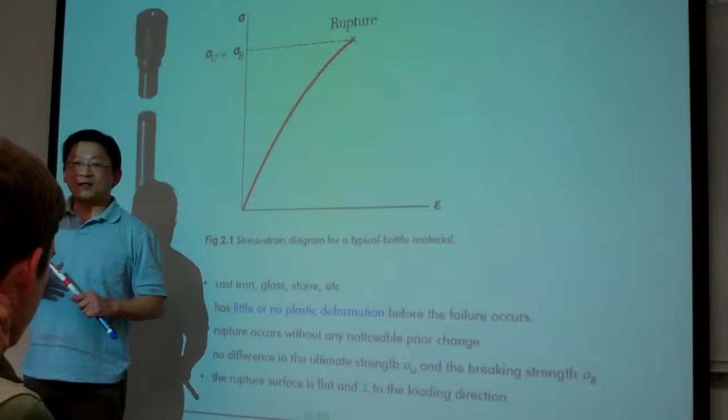Very limited or narrow range of the elasticity. Basically, you simply give a slight kick, then that material will get into plasticity, and right away the energy will be absorbed. If that material has any defect, then the crack will propagate easily and get until the fracture. But compared to the ductile material, it's more, I would say, stronger than accepting the loading.

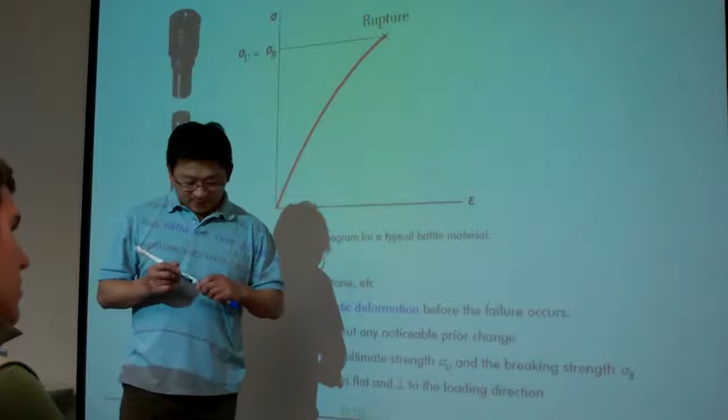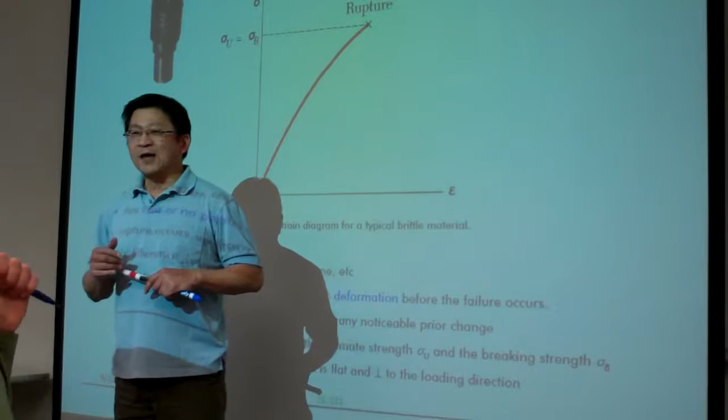Probably that time you haven't been born yet. 1989, 1987, I forgot. There was during one launch of the space shuttle, and it just exploded, I think, within a few minutes after launching. Do you remember that story? Challenger? I forgot which one. It happened in the 1980s, probably 87 or 86, whatever. Probably that is before you were born, right? Most of you were born here.

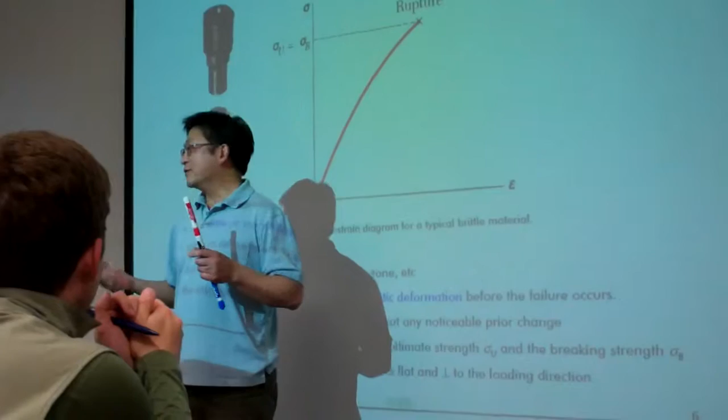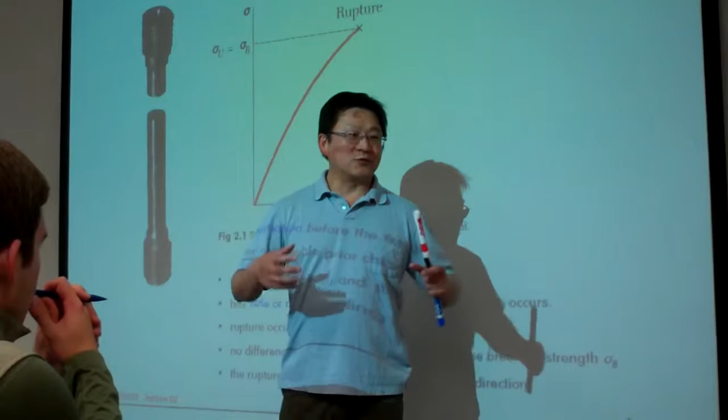Yeah, it was like there was a thermocouple failure at the end. Not thermocouple, it was an O-ring. That is due to the fuel leak through the O-ring. Why? Because under very extreme low temperatures, the O-ring, although it's rubber, under that low temperature basically becomes like glass, a glass-like material. Becoming glass, the O-ring loses its capacity to prevent that kind of leakage. So the fuel leaked from there, then it got ignited by the fire, and they just exploded in the air. That is one quick example for this.

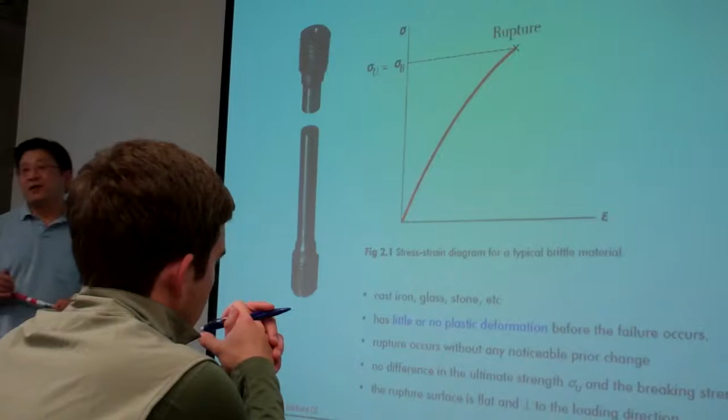And that is, more information will be about the material science, and that is called the glass transition temperature, about this kind of material. That's a different story, we don't need to consider that one. So let me move on quickly.

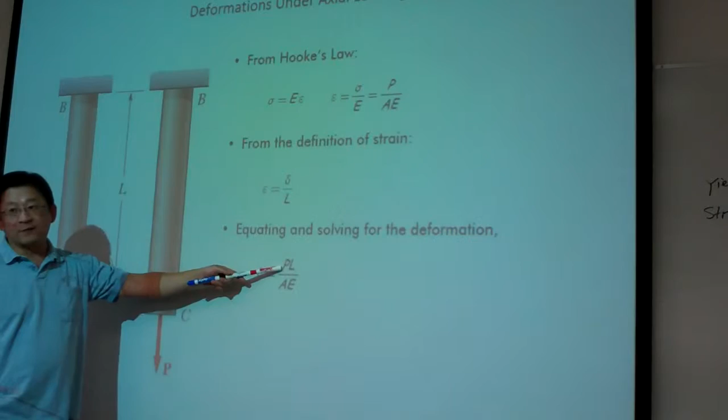Basically, those are the material properties. So this one, compute delta equal to PL over EA. Sometimes people like to use F, some depends on the symbol you use. Sometimes people use F, so delta equal to FL over EA. Don't feel surprised, this is the equation.

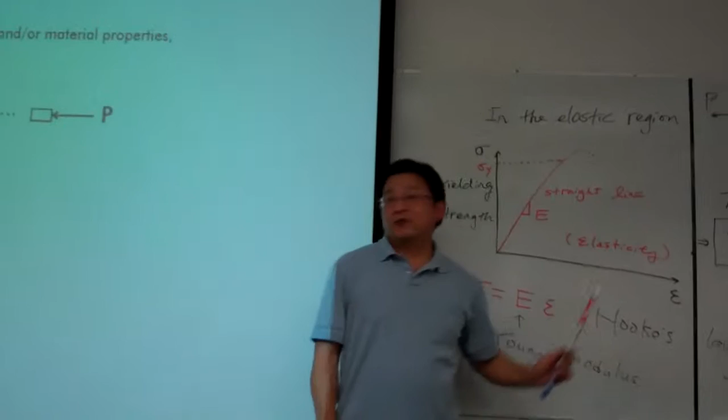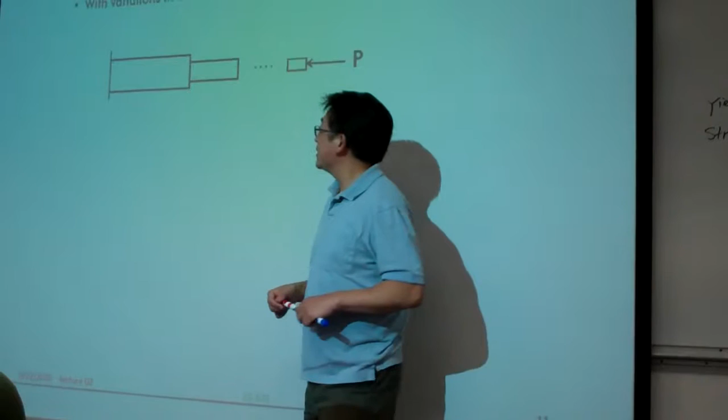We can apply this equation to many scenarios, and the follow-up is the application of this equation. For example, we might be able to apply this basic, generic form, or template, to different material models. For example, the first case I'm showing is the non-homogeneous material. What we call non-homogeneous means the cross-section is varying from one place to another. If we call it homogeneous, that means everything is uniform, everything is the same. So for this case, how can we calculate?

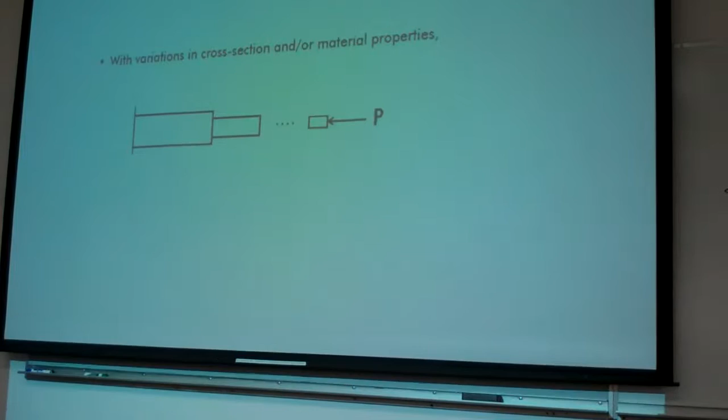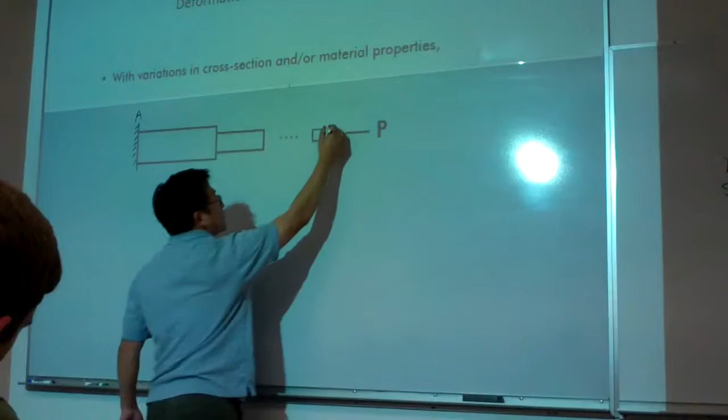I will get that out. So maybe let me utilize these slides and write down some words. For example, for this case, let me call this end A. This is fixed against the wall. And let me call this end B. And in between, let me say this is C, D, etc. So for example, we want to calculate

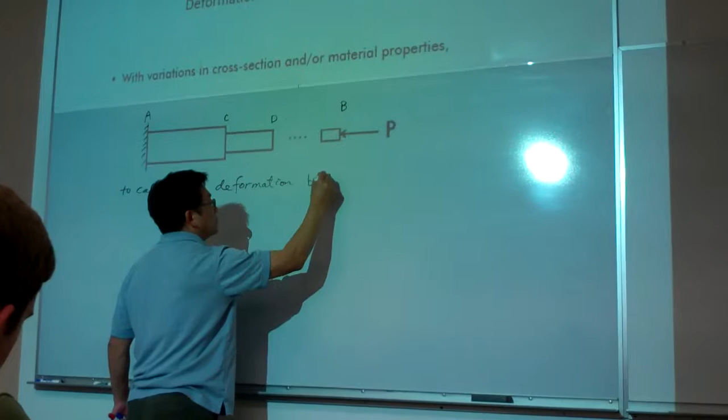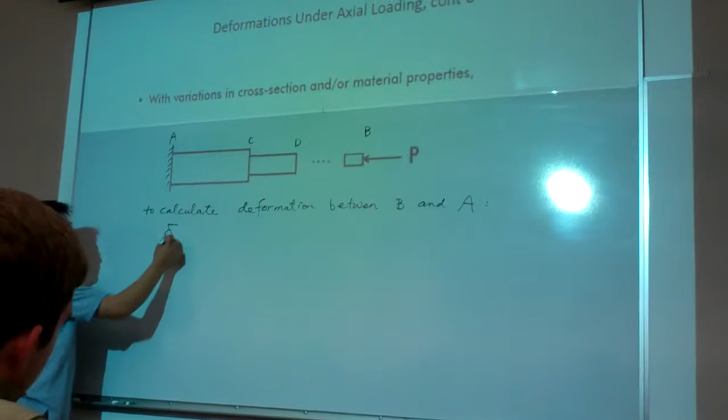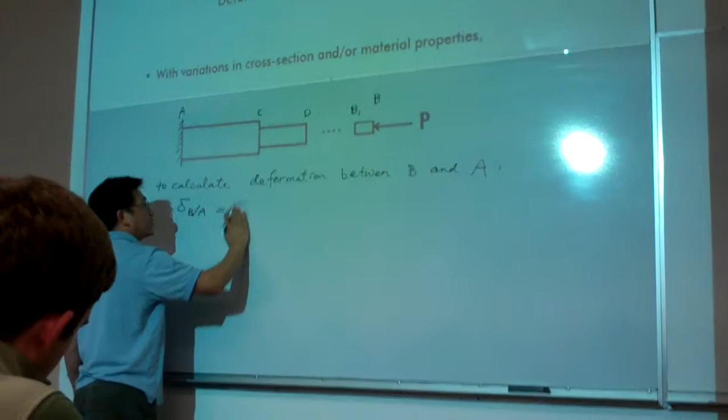deformation between B and A. So that means I want to calculate what is the deformation of the total non-uniform bar. So for this example, we can calculate this: deformation B relative to A, that is, for example, let me call this B1. So deformation B relative to B1, and then deformation B1 relative to something, and so on until deformation of C relative to A.

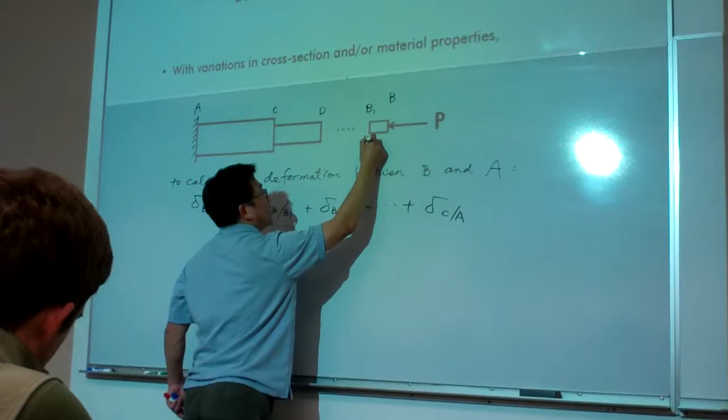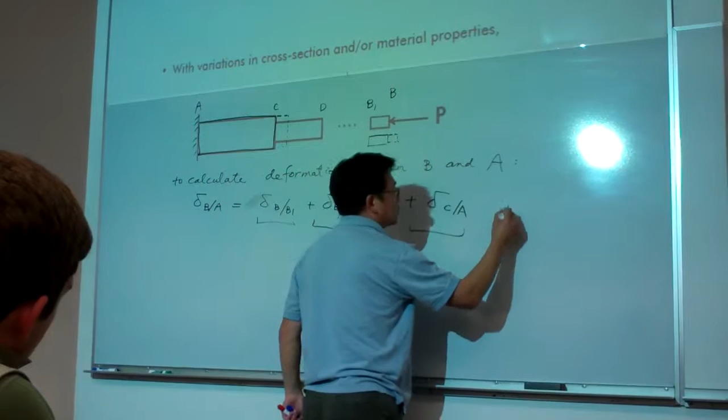So that means this part is the deformation of this case, and this part, if I take this as the material models, then this part simply is the deformation of this one. So simply the technique is this, which is to do the piecewise calculations. Okay, that is the strategy.

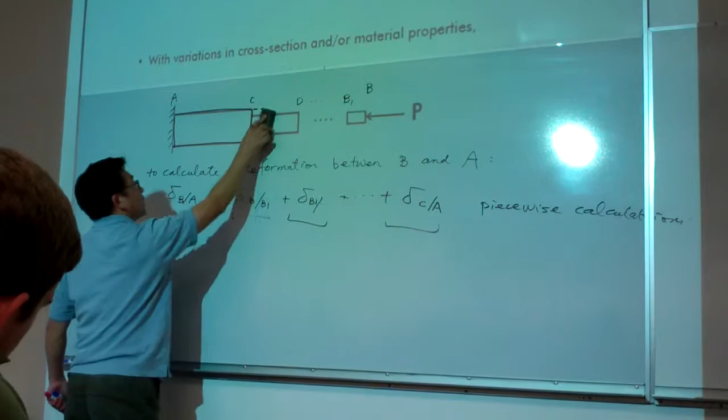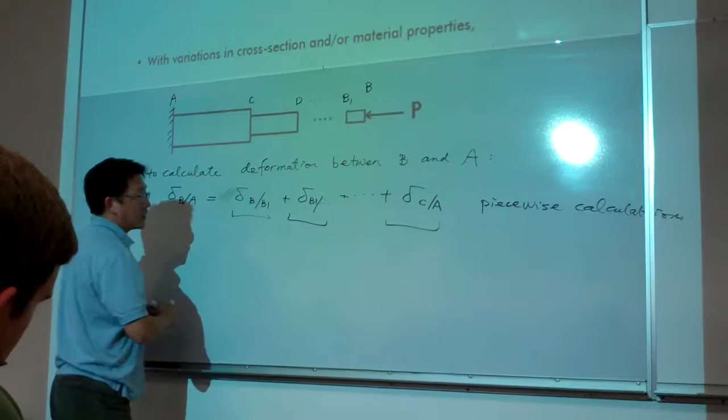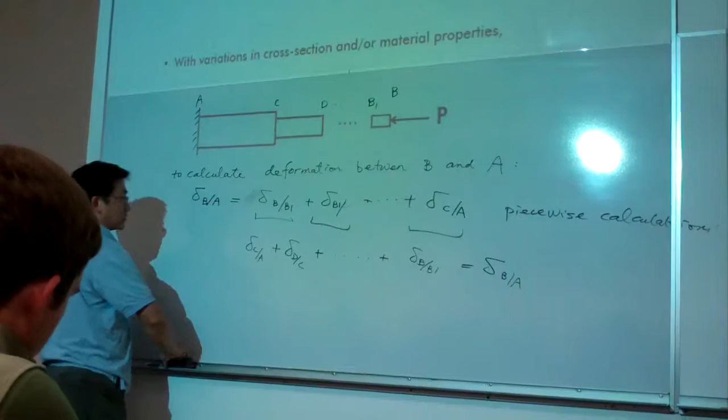And to do the piecewise calculation, let me make these things easier by taking away all the unnecessary drawing here. So for this case, I think this would be easier, allow me to rewrite this. So to cope with the sequence, let me rewrite: B relative to A will be equal to B relative to B1, plus delta D relative to C, plus delta C relative to A. Okay, allow me to erase this one.

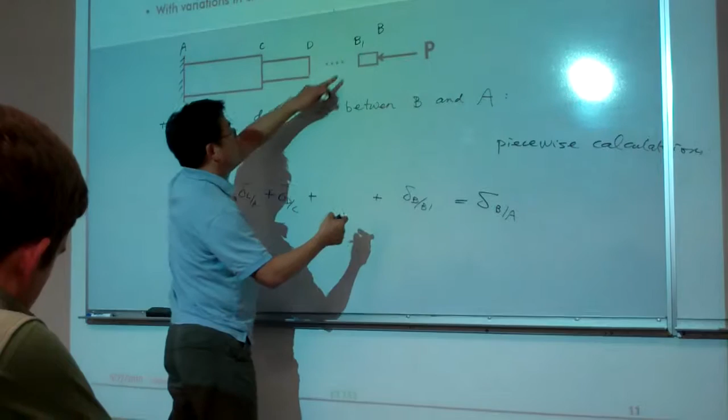So in this way, doing it piece by piece and comparing, that will be easier to mentally work through the things, okay? And actually for this case, right now we take the free body diagram like this. We take the free body diagram for this piece, this is B, this is B1. And then we continue, taking the free body diagram on CD, and then also we take the free body diagram on CA.

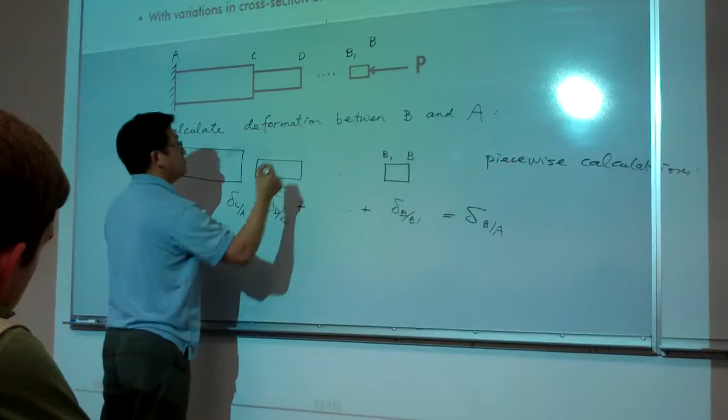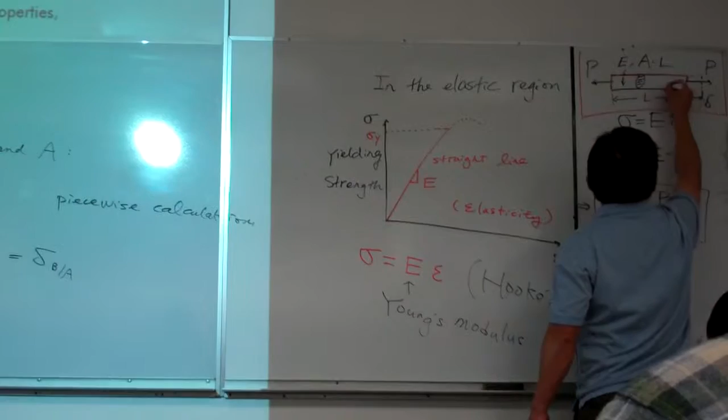Right now I want to utilize our generic model. For our generic model, we only have one uniform material bar. So to utilize that equation, I must come up with a drawing of the free body diagram that fits into that material model so we can utilize this equation.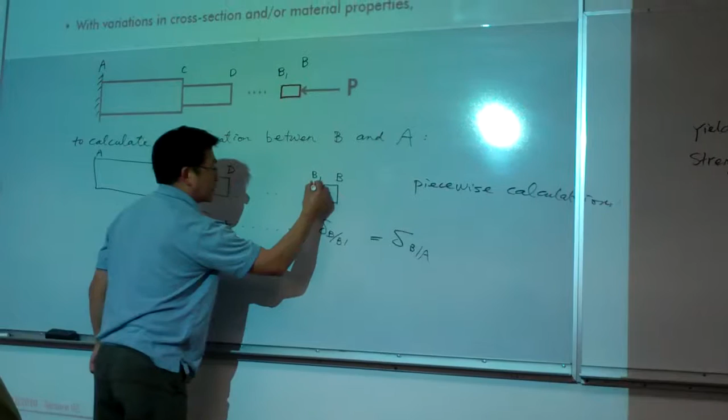For this example, I pick this as the free body diagram. Then gradually I work on the individual pieces, trying to find out the basic material model that can fit into that case. You know what I mean?

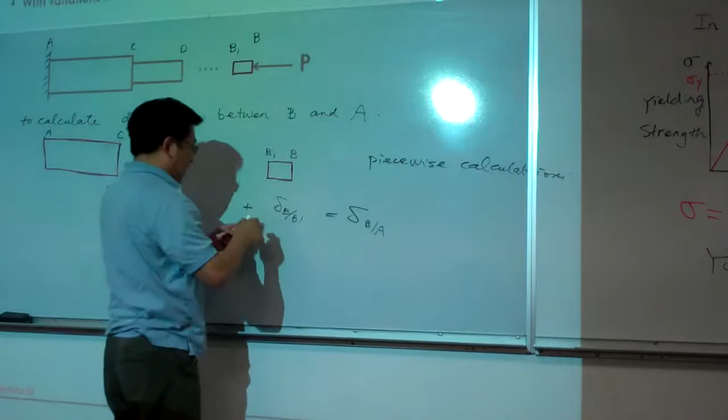That is a material model. Then we analyze the force. The P applied here, that is given.

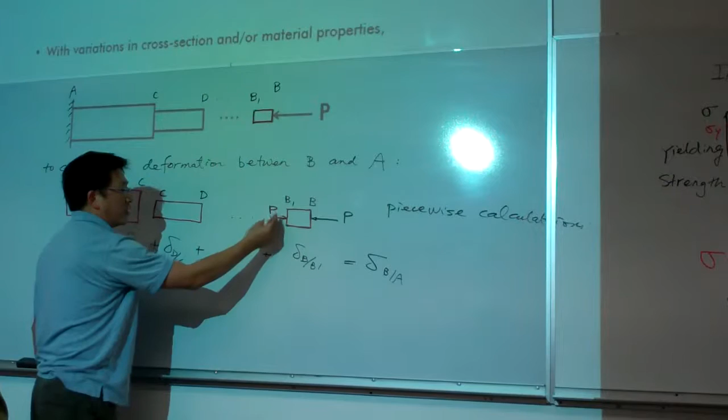In these serial connections, by taking the force equilibrium, let me use the color. This is the action-reaction force on this side, and this is P. Again, in each piece across the interface, the reaction will be transmitted. So in this case, here will be P, and here is P. Reaction, action, reaction, this is P, and this is P. Am I right?

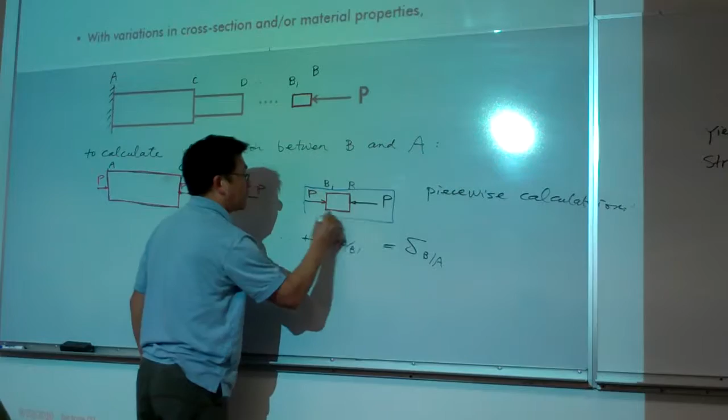If you look at individually, this is the material model we're fitting into our basic definitions. For this, that is another one. And for this, that is another one.

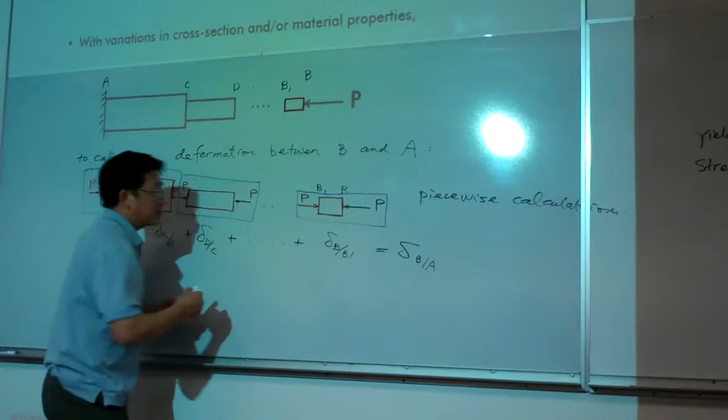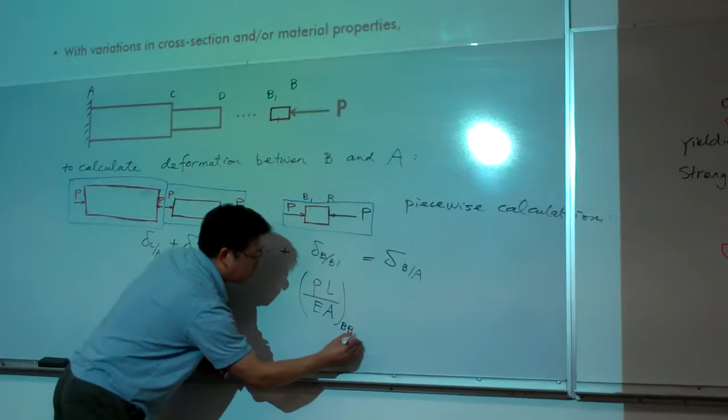So that means B relative to B1 is coming from here, basically that is PL over EA. Take up our geometry, take up our formulas, and this one is pertaining to this material. For example, say if this has the length, whatever the Young's modulus, whatever the area, let me call this for the portion BB1. So we have to take up whatever information is given in this problem in this segment. That is the meaning of this symbol.

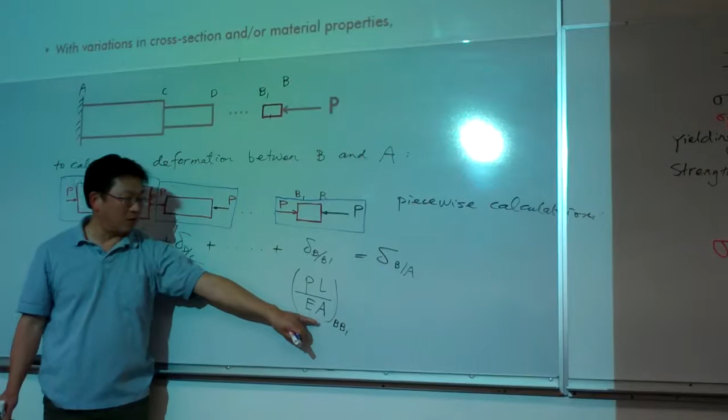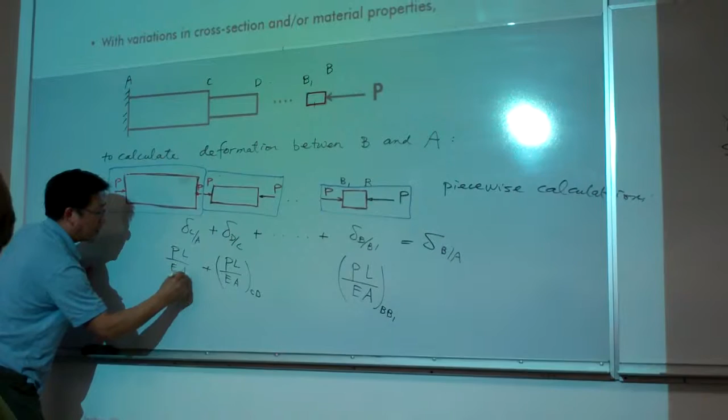And then the same thing for this one, that is PL over EA, for whatever the information in this piece, and that piece is CD. And then in this case, this is the portion for this one, that is PL over EA, for whatever the information that is AC.

How come the last one's not B1 B? Huh? How come the last one's not B1 B? Oh, either way. Just label it. You know what it means.

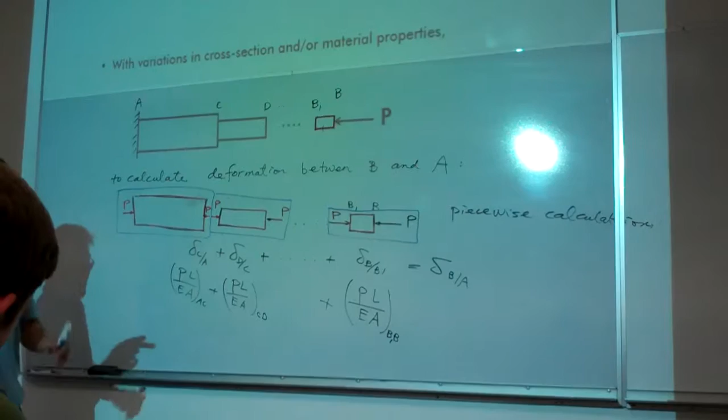Okay, doesn't matter. Since we're compressing all those, will we have a negative delta? Yes. For this example, that is a magnitude, and in total, that is compressive.

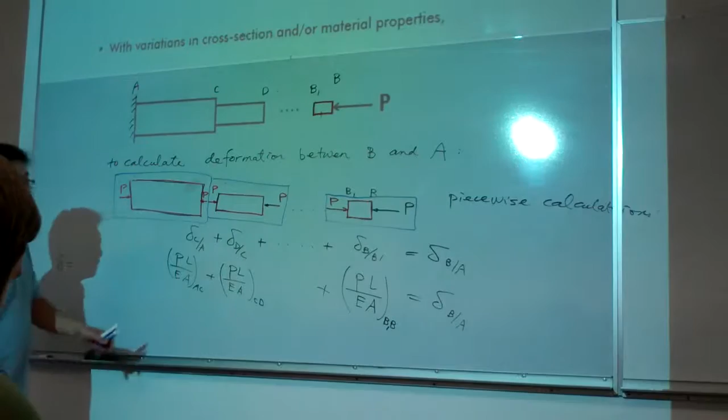So in general, for this case, we write it up based upon this information: this is B relative to A, that is the summation of the piecewise calculation. For each piece, we still stick with our generic platform here.

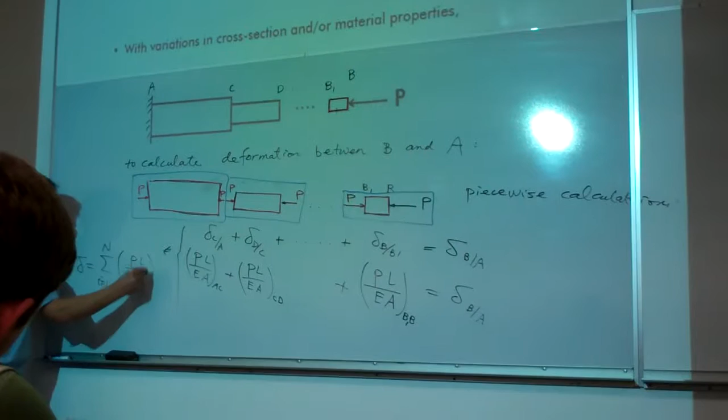So in general, for this case, we simply have the more general equation: for each piece from i equal 1 to N, that is the label of PL over EA. For each segment, we simply take out the individual terms and take the sum together. More practice will be on using these equations.

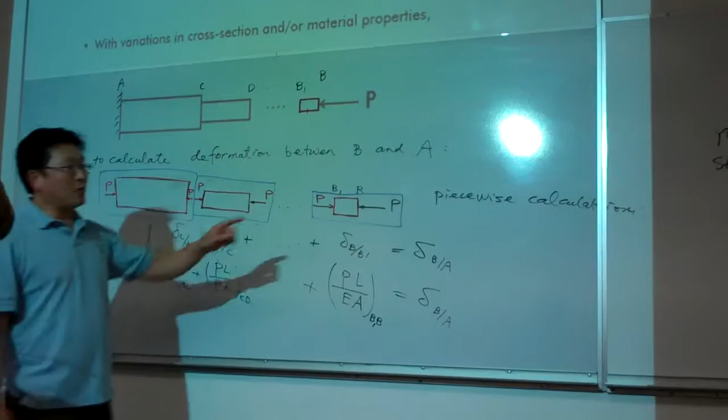Again, I wouldn't say this is a formula, just a symbolic calculation. The only formula is that one. And how to apply to this, we can use example C. Let me work on this one first, and then we'll go back to the different scenario.

Do you need me to turn off the light? Would that be okay working on this? Okay.

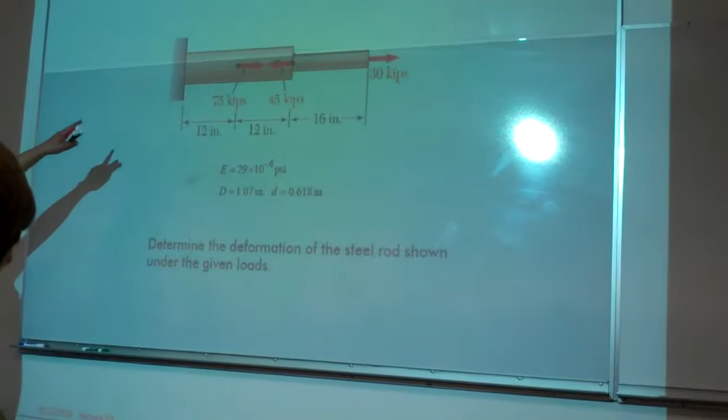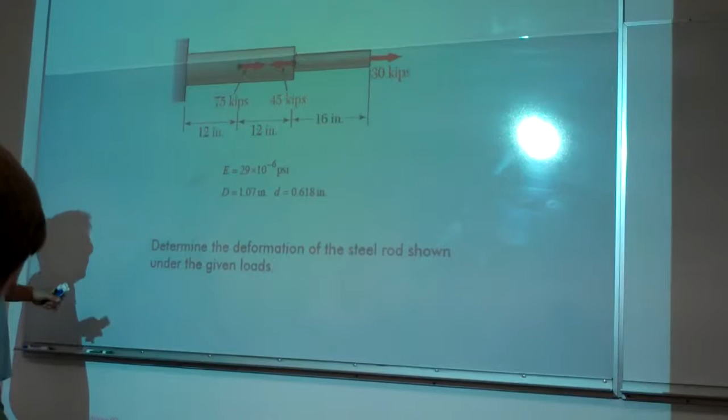So for this case, we have a loading like this. Here we have two pieces of different size bars. We want to calculate the deformation of this, made of steel. Basically what we want is to find the displacement at this free end, because this is fixed, so the deformation of the system can be represented by the displacement at this point.

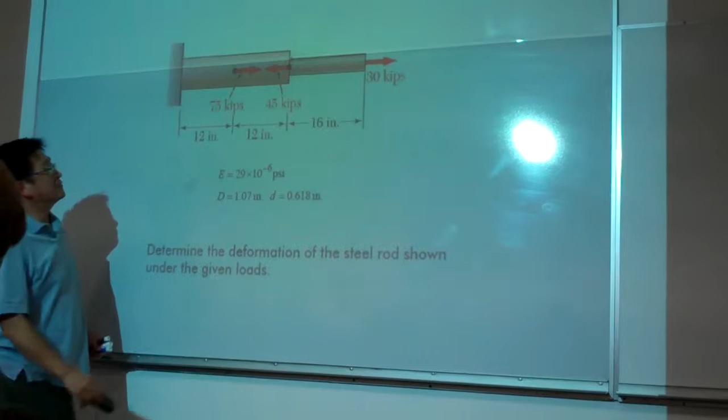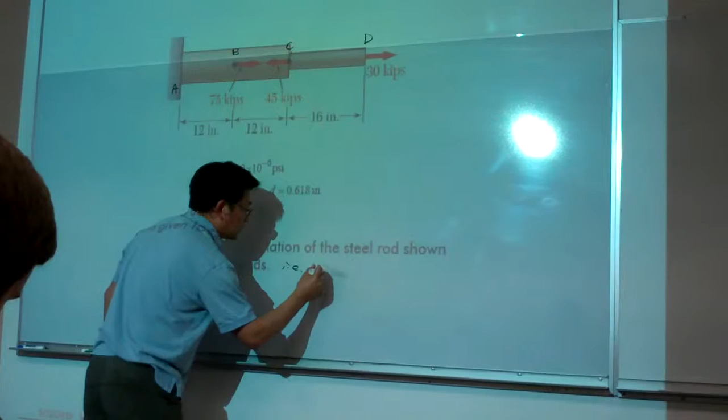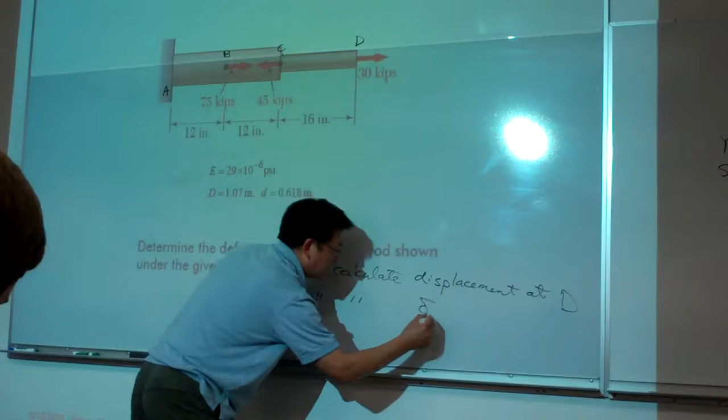So let me label this as A, this is B, this is C, this is D. Basically for this case, we calculate delta to calculate the displacement at D, or to calculate this deformation D relative to A. Either statement is equivalent. Displacement is the movement of one point from one place to the other. Deformation is the change in the dimension of the whole materials. Hopefully you can understand the difference between the terminologies.

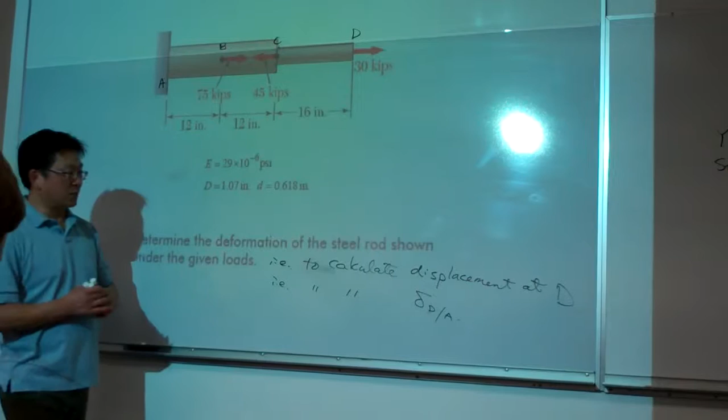Let me kind of peek, because I couldn't memorize my slides, so many, and I know some lecturers, some instructors are very good in memorizing what they're going to do next. I couldn't. To be honest with you, I couldn't.

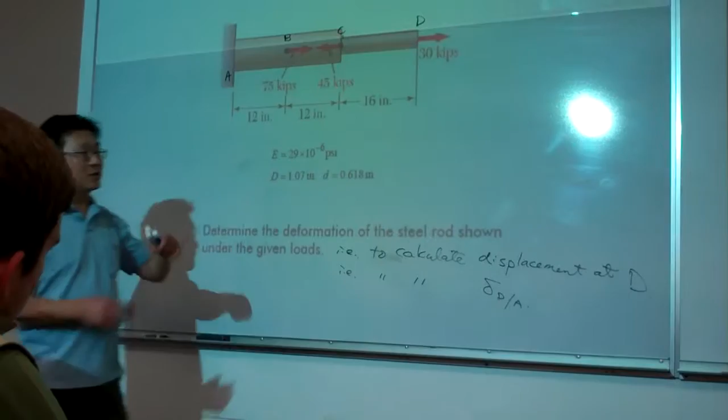For this one, again, we try to stick our concept to this formula. We try, by all means, to make the free body diagrams, multiple free body diagrams, to dissect or bisect this model into a few pieces. Each piece fits into that generic formula.

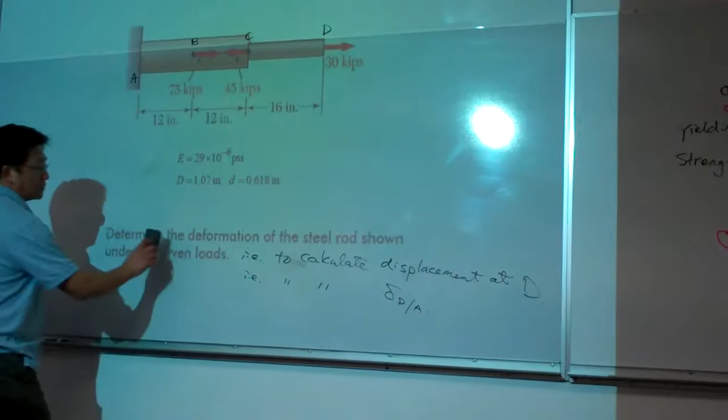Okay, so let me erase this one. And let me copy this one, because I'm going to turn off this slide. I'm going to give myself more working space.

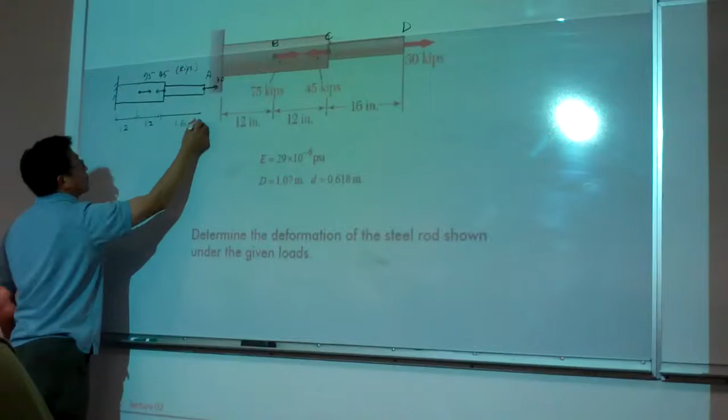Switched your labeling, huh? Oh, that's for the other file, never mind.

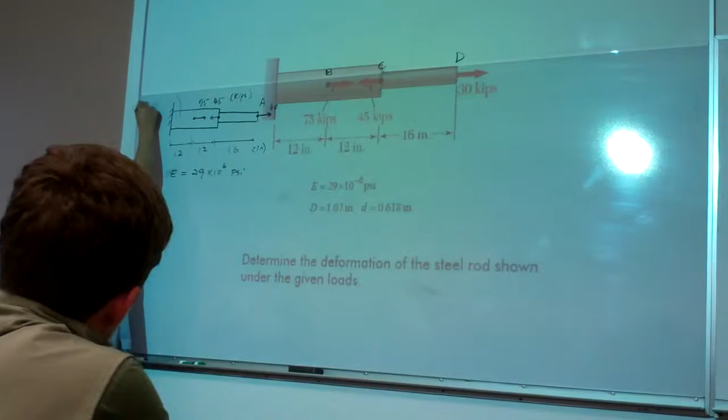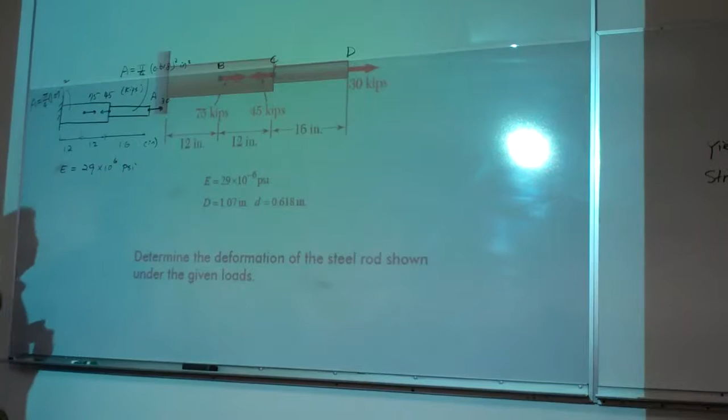Let me try to figure out and put out all the necessary information. 0.618 squared. Okay, so I can turn off this one a little bit. Let me turn on the lights.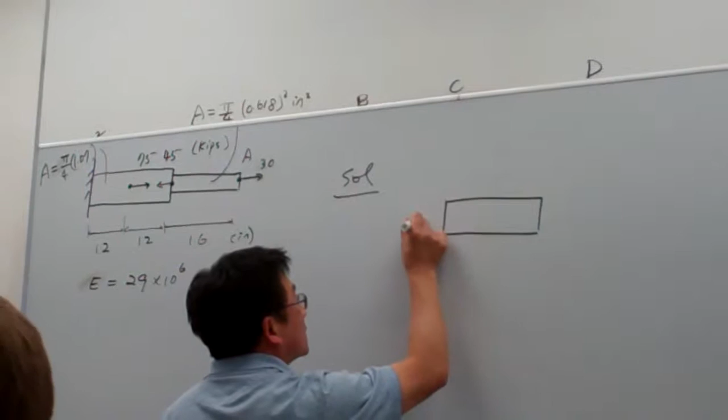So this is our problem, and our goal is to fit into that one. Our generic model is this. Let me write it up. This is the force, P, acting on the uniform material, which means EA and L. Our formula is PL over EA for this segment.

We stick with this generic model, and I'm going to do something here. You can see across the two bars, I'm going to put into the segments. How many segments?

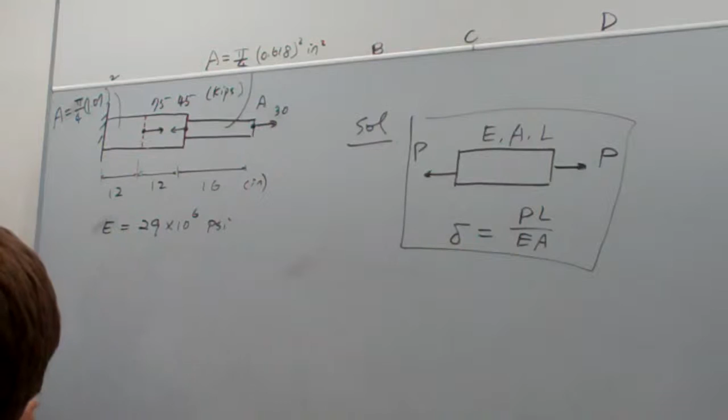1, 2, and 3. Because in this segment, if you know statics pretty well, or you can quickly do it, you can see the reaction force in this segment is different from here in general, and could be different from here.

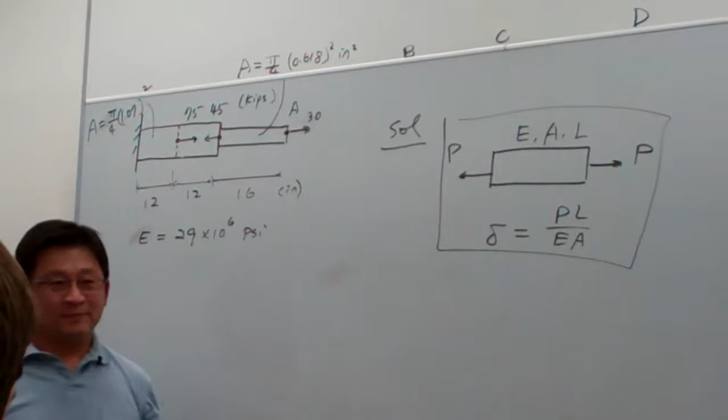So you're going to have two tension forces combining with a... I'm going to do it now, and although I've done this for many years, I still couldn't memorize the numbers. Otherwise, we shouldn't be in engineering, right?

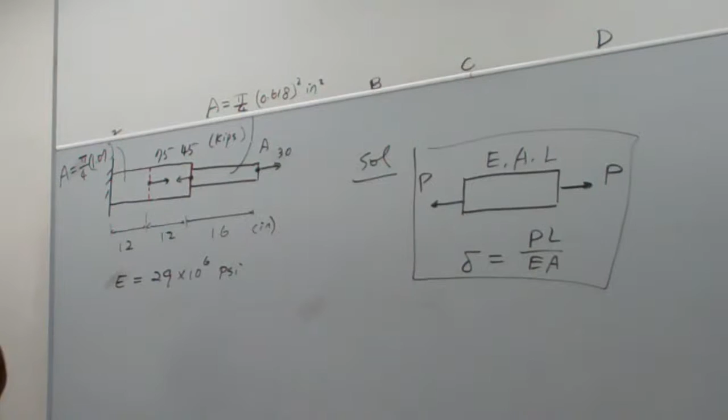So again, here I showed you a tip. How to make the selection of the needed segments. One is to choose wherever the geometry is not uniform, choose from that cross-section, from that interface. The other is to even take a cut where the loading is applied.

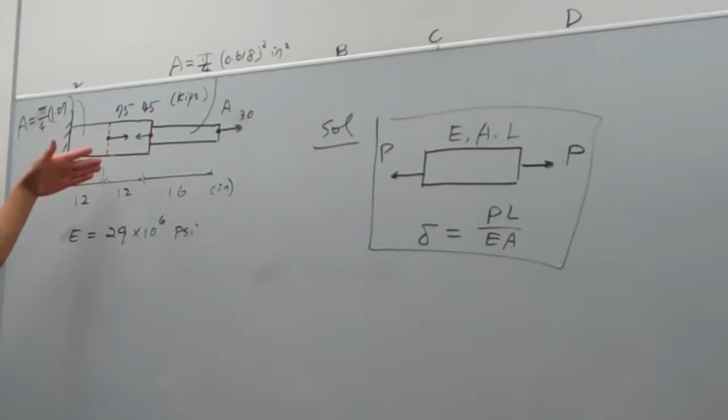Okay, so from here, let me calculate first the distribution of the loading. For example, let me label carefully the locations. So this is the reactions in each piece of the segment.

And what you can do is this: I'm going to gradually build it up. For example, initially, probably in your statics you have learned the force diagram, or called the shear force diagram. Is that right? Yes, right. Only two people nod your head, but let me do it one more time.

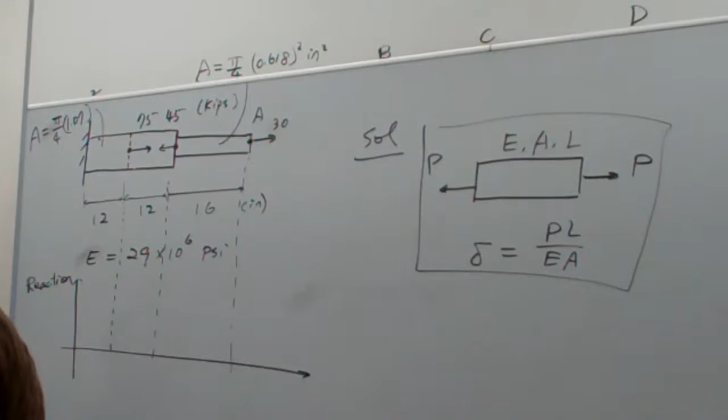So for example, to do this, you can choose a cross section, pick up any cross section. Now the goal is I want to analyze what is the reaction in this piece. So that is my goal. I can do it on the scratch paper here. Let me pick the right hand side.

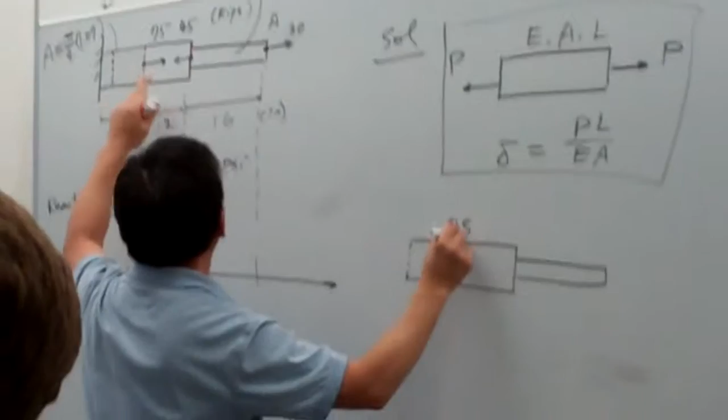So this is 75, and 45. Let me copy the information first. Sorry to make one person bored. So that is the case.

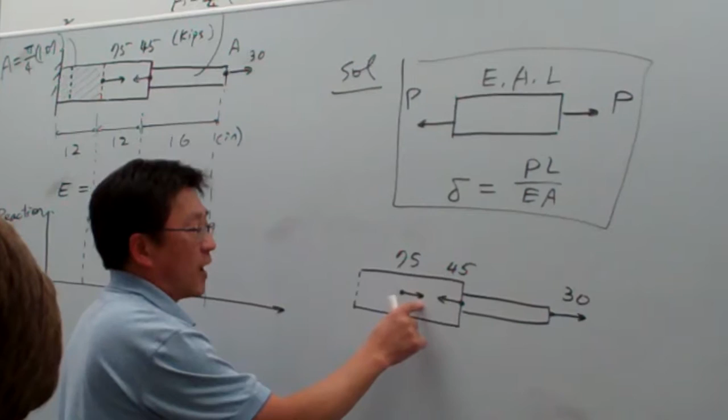Now I want to calculate what is the reaction here. We simply take the force equilibrium. 75 plus 30 is 105, minus 45 is 60. So that means here must be a force of 60, right here.

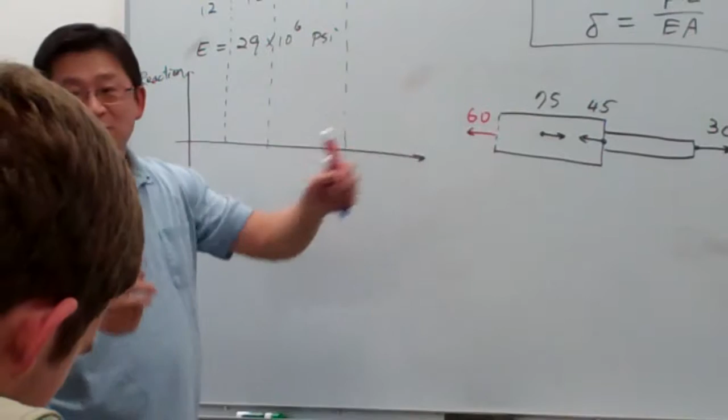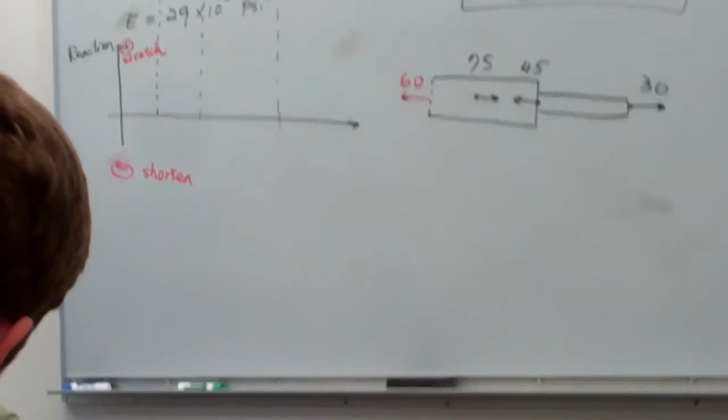Okay, the 60 is the force. And how could we label the force here? The 60 you should use is this, not the 60 pointing to the left. No, the 60 is going to stretch. So the sign convention here I would like to use is this: positive for stretching, and negative for shortening the material. Okay, that is a little bit different from what you learned.